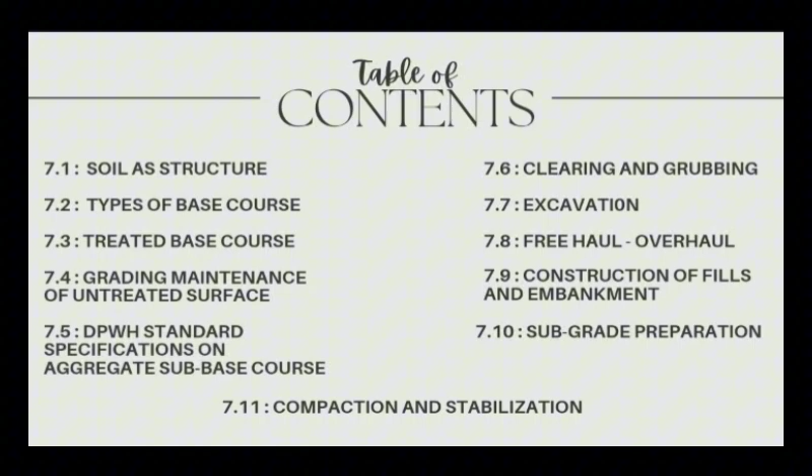Today, we will be exploring the essential process of constructing the roadbed, an integral foundation for ensuring the stability, durability, and safety of our roadways. We will be discussing the soil structure, types of base course, treated base course, grading maintenance of untreated surface, DPWH standard specifications on aggregate sub-base course, clearing and grubbing, excavation, freehaul, overhaul, construction of fills and embankment, subgrade preparation, and compaction and stabilization.

So first, we will be discussing about soil as structure.

Early road constructions have concentrated mainly on the road surface pavement. Little attention was given to the subgrade, the base materials, and the manner of construction, more particularly the placing and compacting of the pavement foundation.

As a result, too many road failures, past and present, were recorded with endless maintenance and rehabilitation activities. Because of these very expensive undertakings, highway agencies were prompted to undertake advanced researches and studies on the properties of subgrade and soil performance under severe conditions.

After a long study of the unending road failures, road agencies have established a more detailed procedure regarding the kind of materials to be used on a particular condition, type, and behavior of the soil where the road is to be constructed. So, a roadway has three major structural parts, namely the subgrade or subbase, the base course, and the pavement.

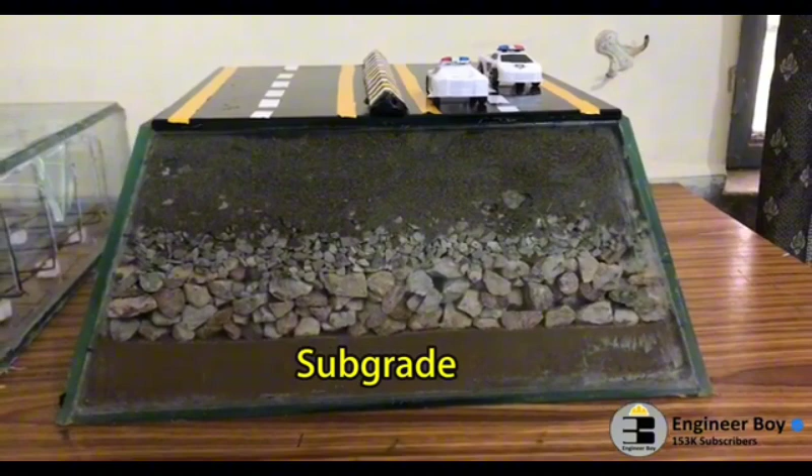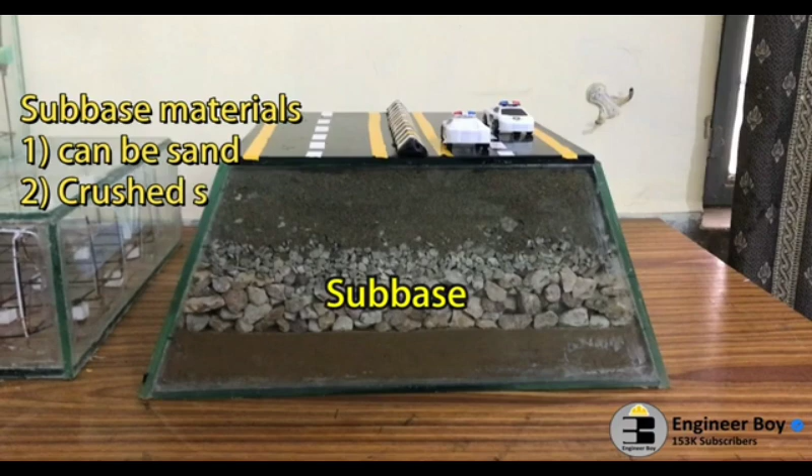Highway or road is a transportation mode on which traffic moves from one place to another. Hey guys, I'm Suleiman Khan, and in this video, we'll be learning about different road components. Number 1 indicates subgrade. Subgrade is just like the foundation of the road, or the lowest component of the road structure, which bears all the load and transfers it through grain-to-grain contact. Subgrade, being the lowest component, is normally constructed at least 60 centimeters above the highest flood level of the area. If the natural surface level is above the formation level, the surface is cut down to the proposed subgrade surface; if it is below the formation level, the subgrade is kept above the ground level. Subgrade is sometimes compacted with a roller, and camber, or transverse slope, is provided to drain off surface water. Next we have the subbase, which is constructed above the subgrade; if the subgrade has high bearing capacity, the subbase may not be required. Subbase is provided to prevent the rise of water, or capillary action of subsurface water, toward the pavement. Subbase may contain filling materials such as sand, gravel, or sometimes stones. The thickness of this layer after compaction with an 8 to 10 ton roller is normally kept at 7 to 15 centimeters.

And then we have the base layer, which is constructed above the subbase, and it forms the foundation for the road surface or topping. This is just the main component of road which can be paved of cement or maybe bituminous concrete. The thickness of this layer depends upon the bearing capacity of subgrade, and the magnitude of the applied load. And then finally we have the road surfacing or road topping, which can be made up of bituminous material.

For flexible pavement, asphalt concrete is used, and in case of rigid pavement, RCC or PCC may be used. This layer, the road surfacing or road topping, prevents the penetration of water into the base layer and saves the lower layers from the abrasion and other weathering effects of the moving vehicle. This layer also provides a smooth surface for the traffic.

And that's it. This is what I got.

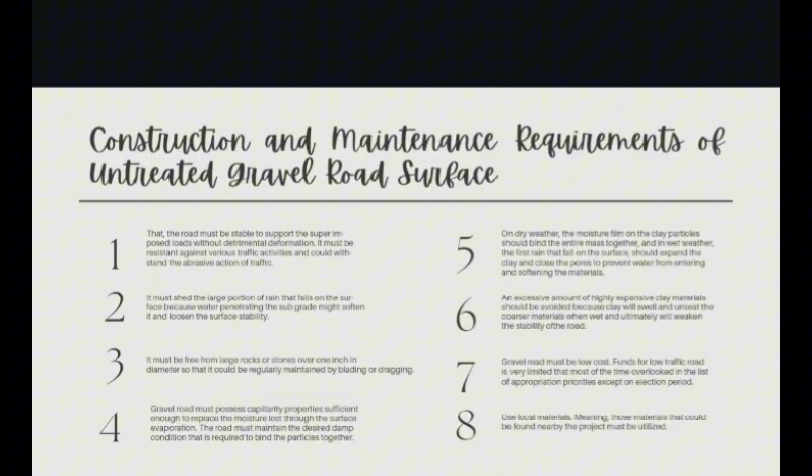So we have the construction and maintenance requirements of untreated gravel road surface. Number 1, the road must be stable to support the superimposed loads without detrimental deformation. It must be resistant against various traffic activities and could withstand the abrasive action of traffic.

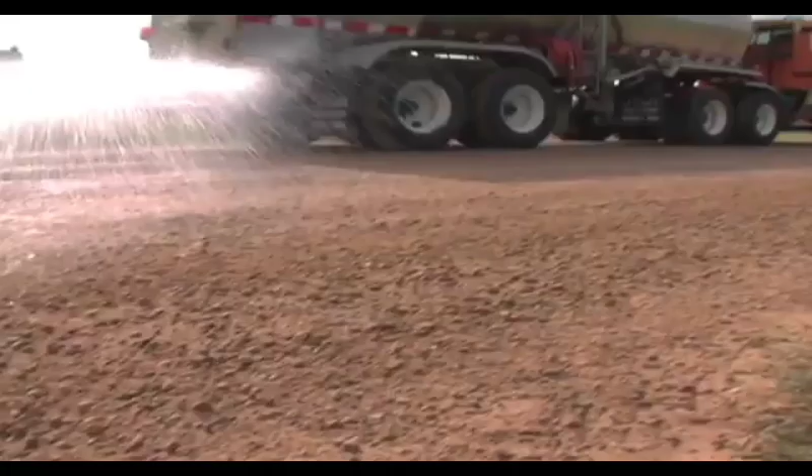What does it take to keep a gravel road in the best condition? Well-maintained gravel roads are the result of a solid maintenance and improvement plan, adequate funding, good materials, good training, and good equipment. A motor grader is the primary piece of equipment used to maintain gravel roads.

Road agencies use a grader to blade gravel roads as often as once or twice a week to once or twice a year, depending on the condition of the road, traffic volumes, and weather conditions.

The crown is the center of the road where it comes together and peaks in the middle. If you don't have enough crown, when it rains, water comes and it congregates just on the road and doesn't really shed off. And then over time, if it's wet in the fall, because that water isn't shedding off, you have more moisture in the road.

And then when it freezes, it expands and causes more frost boils come springtime. Roads are weakest during the spring thaw, when soils are saturated with ground moisture. To protect the investment in the road, it's important to follow weight restrictions each spring.

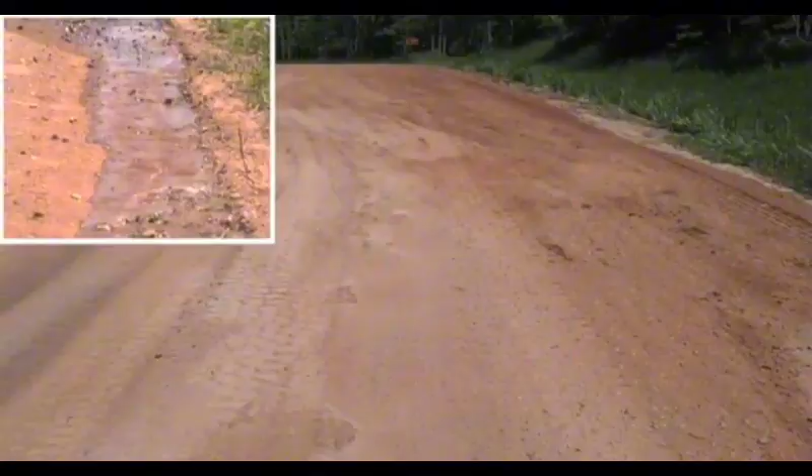What are common problems with gravel roads? There are several major categories of distresses that can be identified in gravel roads: poor drainage, corrugations or washboarding, dust, potholes, ruts, and loose aggregate.

For the most part, these common problems depend on the specific materials used to construct the road, how they are mixed, and how they are placed to ensure proper drainage.

Gravel roads need adequate moisture to sufficiently bind the materials together, especially in the protective surface layer. Without enough moisture, a gravel road will get very dusty, and the fines, which are essential for binding the surface materials, will blow away. The big thing about controlling dust on gravel roads is to only grade roads when you have adequate moisture, like after a rain or in the spring when there's some moisture in the road so that it seals back up.

Without enough binder, the road will washboard easily and leave a lot of loose aggregate on the road surface. In addition, slow rains will soak through the gravel, saturate the road subgrade, and make the road soft. But too much binder makes the road surface sloppy and slippery when it rains.

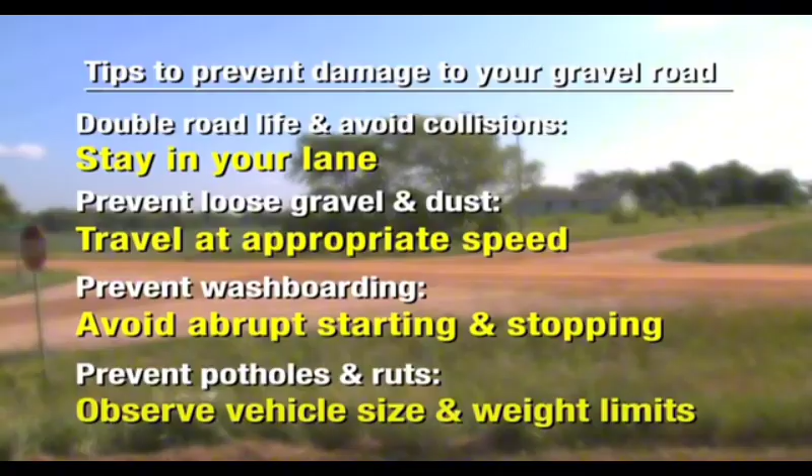What can you do to help maintain the gravel roads in your area? Your local county agency or township are doing the best they can to keep those roads smooth and safe. Local road users can help maintain gravel roads by simply exercising good driving habits. Help keep your gravel road in good condition by staying in your lane, traveling at an appropriate speed for the conditions, avoiding abrupt starting and stopping behavior, and observing vehicle size and weight restrictions. After all, many routine trips and the delivery of day-to-day products and services depend on gravel roads. Without a doubt, gravel roads are a critical part of our transportation infrastructure and an investment worth protecting.

So next, if the gravel surface road is to be maintained for several years without bituminous or asphalt surface treatment or other impervious surfacing, AASHTO standard specifications require a maximum liquid limit of 35 and a plastic index of 4 to 9, and a maximum 8% passing the number 200 sieve.

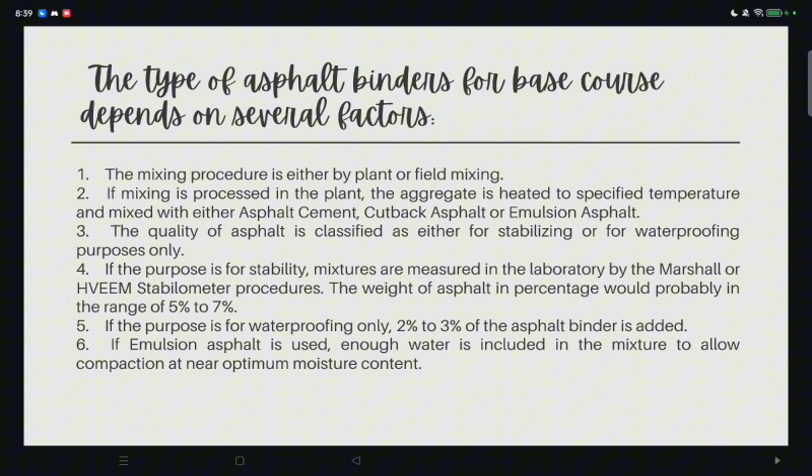So these are HVEEM stabilometer and Marshall stability test machine.

Next, sand and asphalt base course. The sand and asphalt base course is composed of either loose beach sand, dune sand, or river sand cemented with asphalt materials. In early road construction, sand and clay mixture was used not only as road surfaces but also for base courses. But lately, cutback asphalt, emulsified asphalt, or tars have been introduced as substitutes for clay binders to produce quality base courses for roads and highways.

Sand for mixing asphalt should be clean and strong, because the surface properties and grain shape must have the quality to resist displacement under load. If the quality of available sand is not satisfactory, it may be blended with sharp angular particles like crushed aggregate, stone, or screened slag, stone dust, loess, cement, or other non-cohesive minerals to produce a stable mixture.

The test could be done by the Hubbard-Field, Marshall, and HVEEM stabilometer procedures.

So, a sand and asphalt base course is a strong foundation for roads. It's made from clean, strong sand like beach, dune, or river sand, and asphalt like cutback, emulsified, or tar.

So the requirements for this are: first, sand must resist displacement under heavy loads. Second, sand quality can be improved by mixing with stronger materials like crushed stones, slag, or cement.

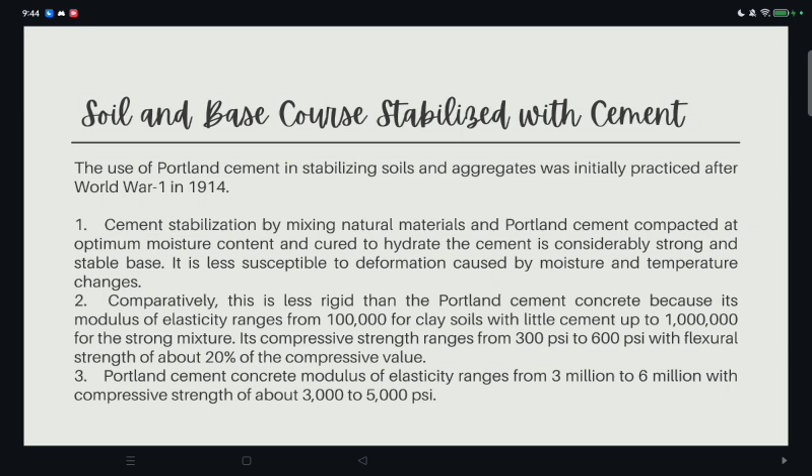So after World War I, builders started mixing Portland cement with soil and aggregates to create strong road bases. The benefit of this cement stabilization is that it resists moisture and temperature changes, and it provides stability and durability. Its comparison to concrete is that it is less rigid than concrete. The flexural strength is 20% of compressive strength. The compressive strength is 300 to 600 psi.

Next, the stabilized cement mixture is called soil cement, produced using abundant native local materials, subdivided into 3 types. First, sandy and gravelly soils containing less than 25% silt and clay. Second, sand with lesser amount of fines like beach sand, glacial, and windblown sand. And lastly, silty and clayey soils.

Materials having plasticity index greater than 30 are rarely used, unless lime is added. Materials with high pH or sulfate content are not advisable for use.

The cement content for the stabilized mixture ranges from 5% to 14% by volume, or 3% to 16% by weight of dry aggregates. Sandy and gravelly soils require less cement, unlike silty and clayey soils that need a higher percentage of cement. The dry densities of cement stabilized mixture compacted by AASHTO standard methods range from 135 pounds per cubic foot for well-graded gravel down to 85 pounds per cubic foot for silty or clayey soils. The recommended field density is about 95%.

The quality of aggregate cement mixture is measured by its ability to resist abrasion and disintegration. Other methods of testing for stabilized cement content are the unconfined and triaxial compression and flexure tests.

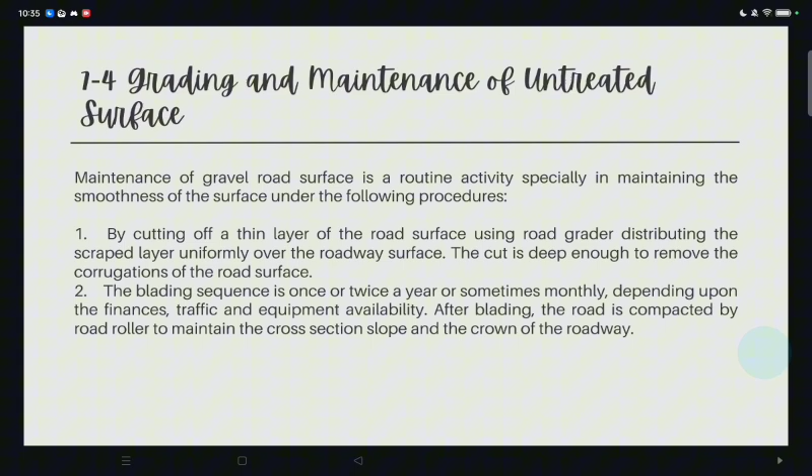Third, the most effective routine maintenance is done immediately after rainfall, when the surface is soft for the blade to drag. Fourth, losses of materials caused by grading and traffic wear generally range from 1/2 to 1 inch of thickness per year, although this varies due to traffic volume, rainfall, wind intensity, frequency, and maintenance practice or habit.

Lastly, compaction is effectively done using pneumatic, tired, or steel-wheeled rollers, where the surface is tight and non-ravelling, so sealing may be omitted. Next, we'll discuss the DPWH standard specifications and aggregate sub-base course.

The Department of Public Works and Highways classified the aggregate sub-base course as Item 200, which consists of furnishing, placing, and compacting aggregate sub-base course on a prepared subgrade.

For Item 200 material requirements, aggregates for sub-base shall consist of hard, durable particles or fragments of crushed stone, crushed slag, or crushed or natural gravel, and filler of natural or crushed sand or other finely divided mineral matter. The composite material should be free of vegetable matter and lumps or balls of clay, so that it can be compacted readily to form a stable base.

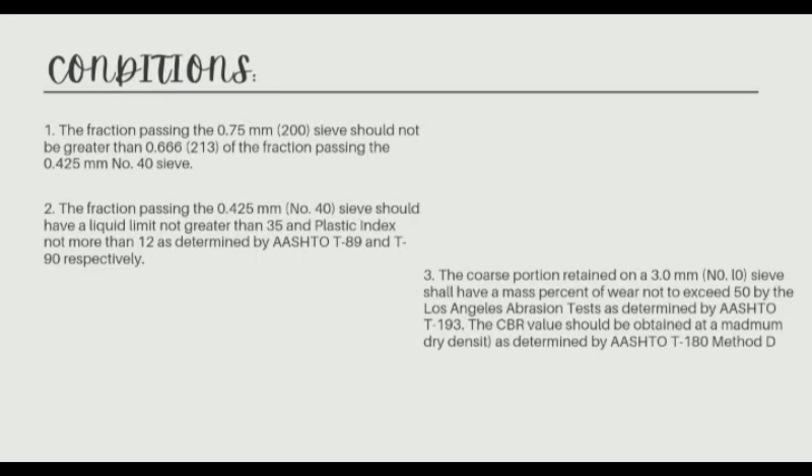Condition number 3: the coarse portion retained on a 3 millimeter, or Number 10 sieve, shall have a mass percent of wear not to exceed 50 by the Los Angeles abrasion test, as determined by AASHTO T193. A CBR value should be obtained at maximum dry density as determined by AASHTO T180, Method D.

Number 2: the fraction passing the 0.425 millimeter, or Number 40 sieve, shall have a liquid limit not greater than 25 and a plastic index not greater than 6.

Number 3: the coarse portion retained on a 2 millimeter, or Number 10 sieve, shall have a mass percent of wear not to exceed 50. Number 4: the materials passing a 20 millimeter or 3/4 inch sieve shall have a soaked CBR value of not less than 80%.

So makita natin sa right side ng table 7.4, ang grading requirements for item 201. Ano na siya? Sieve designation, kag ang mass percent passing.

Next is the item 202 material requirements. Number 1, the portion passing the 0.075 millimeters, number 200 sieve, shall not be greater than 0.66, or 2/3 of the portion passing the 0.425 millimeters, number 40 sieve. The portion passing the 0.425 millimeters, number 40 sieve, shall have a liquid limit not more than 25 and plastic index not more than 6. Number 3, the coarse aggregate retained on 2 millimeters, or number 10 sieve, shall have a mass percent of wear not more than 45 by LA abrasion tests, and not less than 50 mass percent, shall have at least one fractured face.

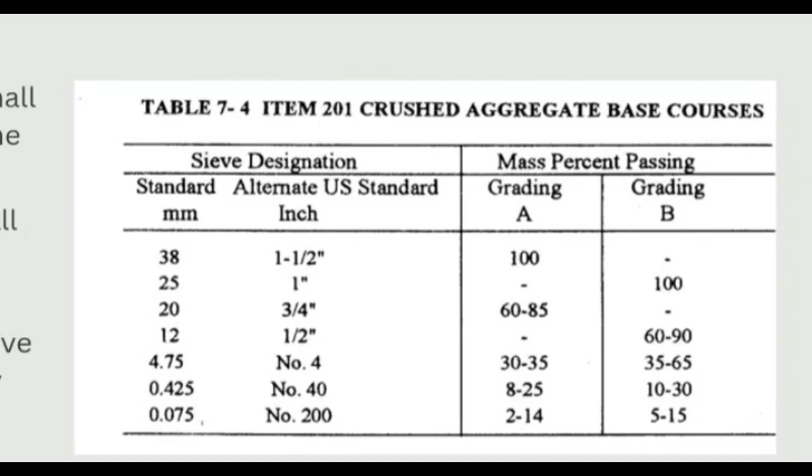Number 4, the material passing a 20 millimeters or 3/4 inches sieve shall have a minimum soaked CBR value of 80%. So nakita natin sa right side ng table 7.4, gin-zoom ko siya. Ang item 201, crushed aggregate base courses, you have the designation, ang sieve, kag ang mass percent passing. We have grading A kag grading B.

Next is the item 203, lime stabilized road mix base course. So this item consists of foundation for a surface course composed of soil aggregate, lime and water proportion mixed on site and constructed on a prepared subgrade or subbase.

So ang item 203 ko, is about sa lime stabilized road mix base course. Ini nga item consists sa soil aggregate, lime, kag water proportion nga gin-mix sa pag-prepare sang subgrade kag subbase. So bale ginaadan siya sang lime mixture.

So may material requirements tana. Number 1, soil aggregates refers to the combination of gravel, sand, silt, and clay or other approved combination of materials free of vegetable or other objectionable matter that might be encountered in the construction site or obtained from other approved sources. Ang soil aggregate refers sa combinations ng gravel, sand, silt, kag clay, or iban nga approved combinations ng material nga wala sang organic matter, wala sang vegetable, kag iban pa nga objectionable matter nga ma-encounter ta sa construction site.

Number 2, the intent of the specification is to utilize soil existing on the roadbed if the quality is satisfactory according to the specifications and minimizing cost. So need natin i-specify para mabalanta kung ang soil nga exist sa roadbed, kung ang quality niya ba ay satisfactory na based sa specifications.

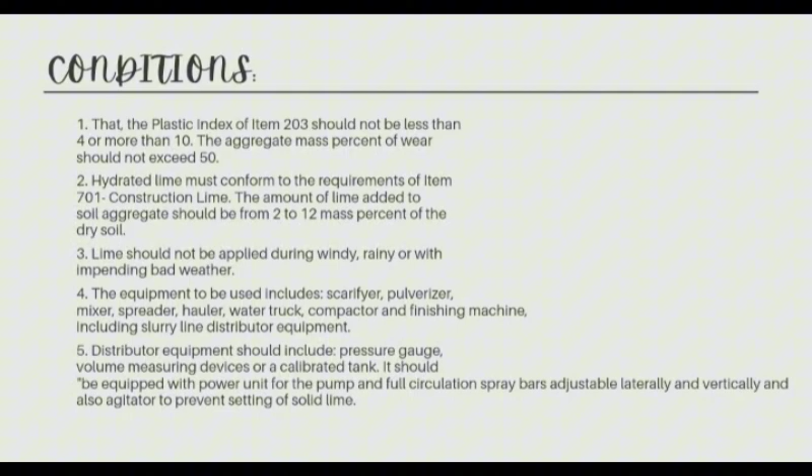Next is the preparation of the soil aggregate. Case 1 for new soil aggregate: the existing road bed is scarified lightly and bladed to a uniform grade according to the plan, then rolled, watered, and rolled. All depressions appearing on the surface are filled, and weak portions of the road bed are strengthened with new soil aggregate. Allow 1 day for measuring, sampling, and testing of the sample for approval of quality and gradation before spreading the windrow for application of hydrated lime.

If soil aggregate moisture exceeds 2 mass percent of the dry aggregates, apply aeration by harrowing the soil aggregate until the moisture content is reduced to 2 percent or less.

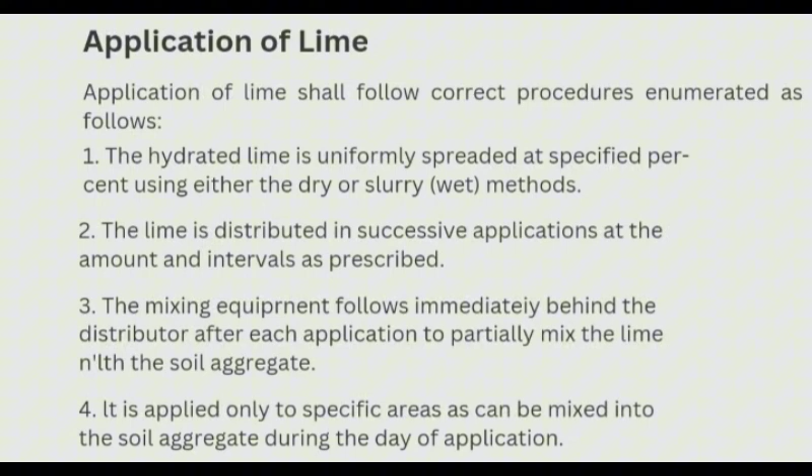It is applied only to specific areas as can be mixed into the soil aggregate during the day of application. The application is either by spotting bags of lime at equal predetermined transverse and longitudinal intervals, or by applying in bulk from equipped self-loading trucks.

If lime slurry or wet method is employed, the typical slurry ratio is 1,000 kilograms of lime to 2 cubic meters of water. The actual mixing proportion depends upon the percent of lime specified, the type of soil, and its moisture condition.

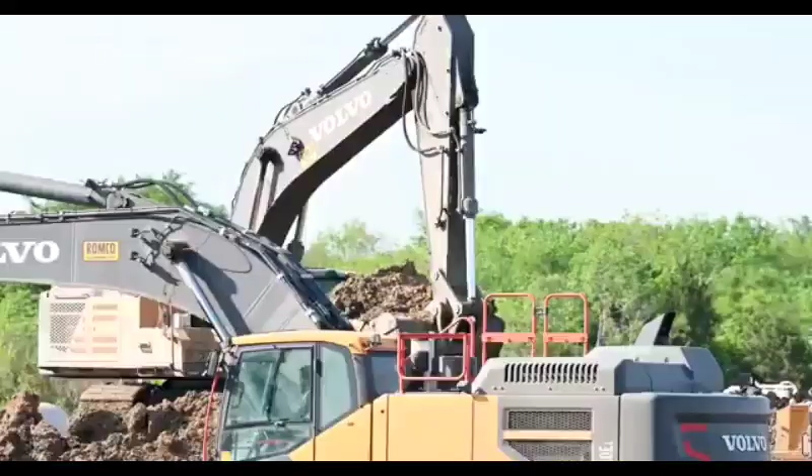Out here we are on site with LGE Design Build today, flying their job with some drones, and caught a little bit of the lime treatment process that they're dealing with right now.

Here in North Texas, we have absolutely terrible soil as far as the top layer goes. We've got some shale underneath, some rock under that, but overall the soil out here in Dallas and the DFW, North Texas region, is really bad.

The reason why it's so bad is because as rain comes in, and as we get these summer days where it's really dry, what tends to happen is the rain will swell the soil and make it huge like a sponge, and then once it dries out, it'll shrink back, kind of like that crack effect if you've ever seen a desert picture where it's cracked.

Same thing - the water will just be gone immediately, and it will shrink back down to its old size. Then it will do that over and over again until it breaks your foundation to bits.

So there are really three ways to mitigate that here in the North Texas area. One is to import actual quality soil as your pad. The second is to moisture condition your pad, taking all your soil and mixing water into it, then compacting it to get your maximum PVR.

Your PVR is your potential vertical rise. That's normally within the range of 2 to 15 inches in this area, which is a huge change in elevation when you hear water to soil ratios. Once they mix that water in with the soil, they will compact it on lifts until they get their maximum PVR and densities.

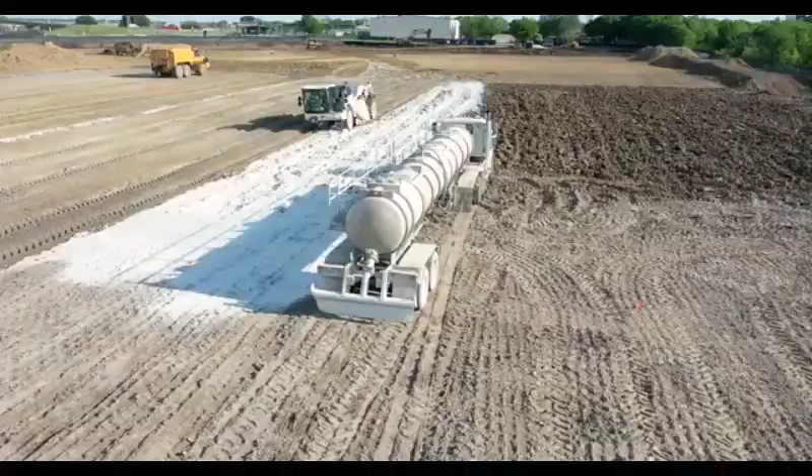Once they've got it to the pad, they've ripped up the soil on top with the rake of a dozer. That gives easy access for all that hydrated lime to seep into the soil and makes it easy to mix. Once they lay down that hydrated lime out of the truck, the pulverizer comes in right behind it and mixes it up.

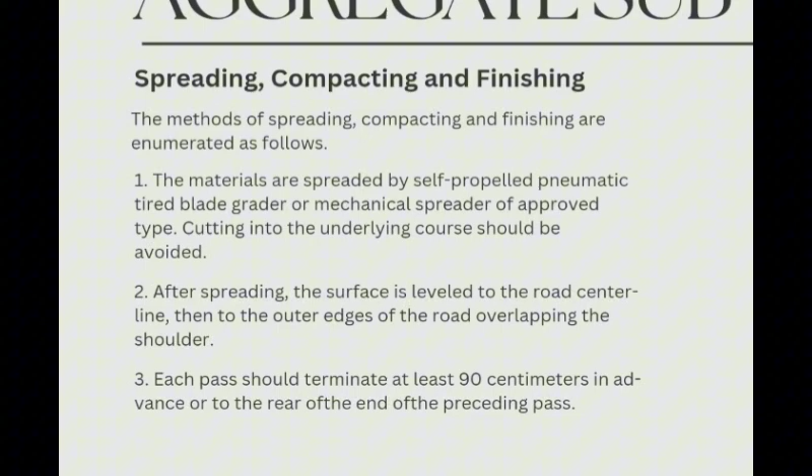So next is ang protection, curing, and maintenance. After stabilizing the base course by lime, it is protected against rapid drying for a period of at least 5 days by either of the following curing methods. Number 1, a thorough and continuous moist condition should be maintained by sprinkling water. Number 2, the surface must be covered with 50 millimeters layer of earth or sand and maintained in moist condition. Number 3, the surface is applied with asphalt membrane of the type and quantity approved by the highway agency.

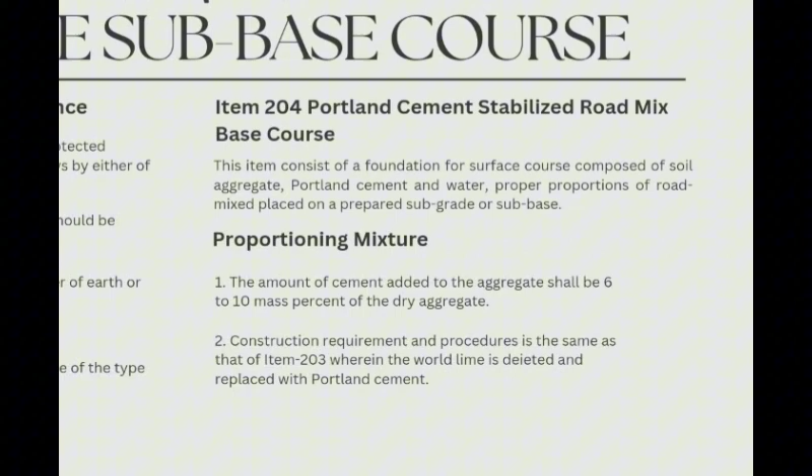So we have item 204, Portland cement stabilized road mix base course. This item consists of a foundation for surface course composed of soil aggregates, Portland cement, and water in proper proportions of road mix placed on a prepared subgrade or subbase. Sa item 204, consists siya sang soil aggregate, Portland cement, kag water. Proportioning mixture: Number 1, the amount of cement added to the aggregate shall be 6 to 10 mass percent of the dry aggregate. Number 2, construction requirement and procedure is the same as item 203, wherein the word lime is deleted and replaced with Portland cement.

So meron makita item 205 and then item 206. Item 205, asphalt stabilized road mix base course. Materials: asphalt materials should be anionic or cationic emulsion asphalt of the slow setting type. Mixture proportion: the amount of asphalt material to be added to the aggregate should be from 4 to 7 mass percent of the dry aggregate.

So we have procedures. Number 1, aggregates to be treated is placed in uniform windrows spread to uniform thickness to the required depth. Number 2, Portland cement of proper quantity is applied uniformly in a trench on top of the windrow or spread uniformly over the aggregates. Number 3, mixing is done by machine for a thorough uniform blended mixture. Number 4, when this method is used, a maximum time of 2 hours is allowed for wet mixing, laydown, and finishing. So next, central plant mixing method.

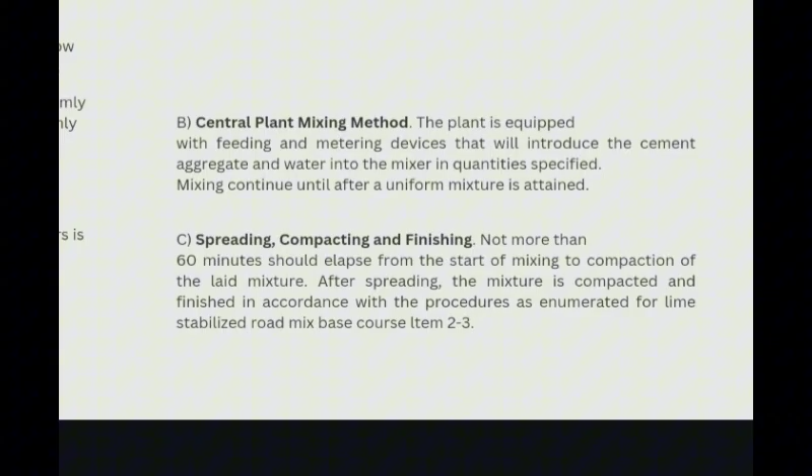Our next topic is clearing and grubbing. This is categorized under Item 100 of the DPWH Standard Specifications. It consists of clearing, grubbing, removing, and disposing of all vegetable matter and debris except those objects designated to remain in place or to be removed in accordance with other provisions of the specifications. It also includes preservation from injury or defacement of all objects designated to remain. So clearing and grubbing means removing plants, debris, and obstacles, disposing of waste, and safeguarding the remaining structures.

So we remove surface objects like trees and stumps. A stump is the remaining base or lower part of a tree. It's the lower part of the tree trunk after the tree has been cut down or has fallen. So whatever remains after the tree is cut, that base or lower part of the trunk is called the stump.

Next is the methods of measurement: number 1, area basis; 2, lump sum basis; 3, individual unit basis or selective clearing. Let's focus on number 1, the area basis: measured by hectare and fractions thereof, acceptably cleared and grubbed. So under area basis, a cleared area is measured per hectare, meaning you are paid per hectare cleared.

So number 2 is the lump sum basis. No measurement of area will be made for this item. Like sa lump sum basis, it's a single fixed payment based on what was agreed upon. Once the payment is fixed, there are no add-ons, no additions, and no required area measurement.

Last is individual unit basis or selective clearing. The diameter of trees will be measured at a height of 1.4 meters above the ground. Trees less than 15 centimeters in diameter will not be measured for payment. So sa individual unit basis or selective clearing, the diameter of trees will be measured at a height of 1.4 meters above the ground. The payment here is pay per tree, and only for trees greater than or equal to 15 centimeters in diameter. So if the tree's diameter is less than 15 centimeters, wala ka bayaran.

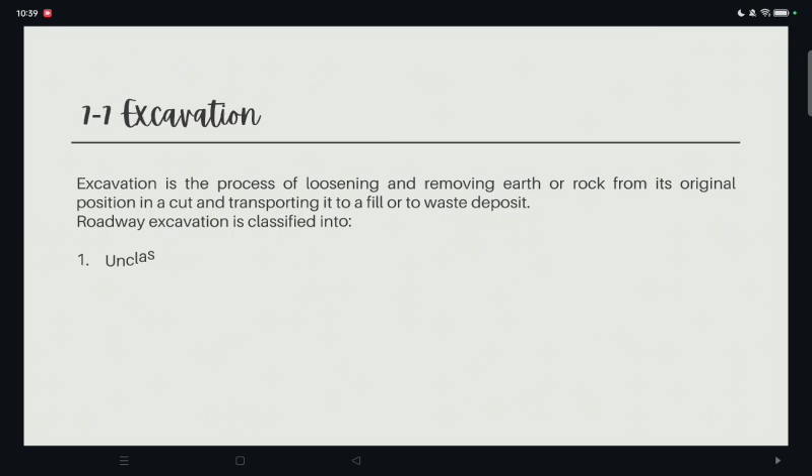So the next topic is 7-1, excavation. Excavation is the process of loosening and removing earth or rock from its original position in a cut and transporting it to fill or to waste deposit.

Roadway excavation is classified into unclassified excavation, rock excavation, common excavation, muck excavation, and borrow excavation. Unclassified excavation is the excavation and disposal of all materials, regardless of its nature, that are not classified and included in the bill of quantities under other pay items. In short, removing mixed materials of any type.

Rock excavation consists of igneous, sedimentary, and metamorphic rocks that cannot be excavated without blasting, or the use of rippers, and all boulders or other detached stones each having a volume of 1 cubic meter. In short, blasting or ripping hard rocks and boulders.

Common excavation are those that are not included in the bill of quantities under rock excavation or other pay items. In short, regular digging, not rock or specialized.

Muck excavation consists of the removal and disposal of deposits of saturated or unsaturated mixtures of soils and organic matter not suitable for foundation materials, regardless of moisture contents. In short, removing soggy, unstable soil and organic matter.

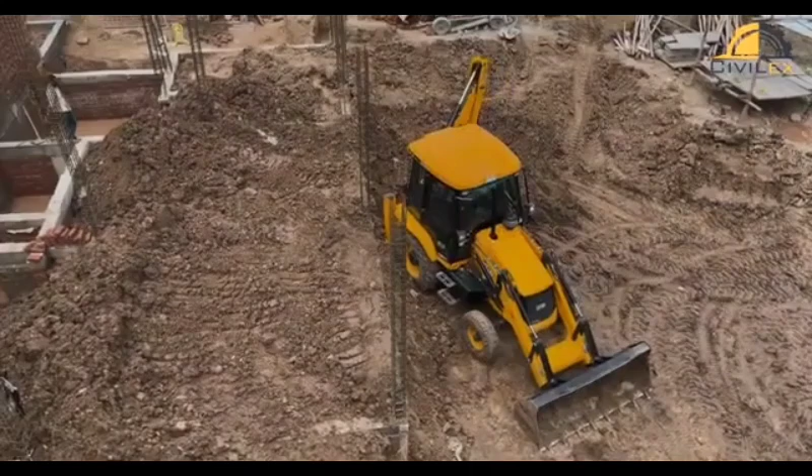Excavation is a critical process in construction, used to prepare building sites by removing soil and rocks from the ground. Here are some key points to know about excavation in construction. Purpose of excavation: the primary purpose of excavation in construction is to create a foundation for a building or other structure. This involves removing soil, rocks, and other materials to create a level surface where the foundation can be built. Excavation may also be necessary for other purposes, such as installing utilities, building retaining walls, or creating drainage systems.

Types of excavation. There are several types of excavation used in construction, including strip excavation, basement excavation, and trench excavation. Strip excavation involves removing soil from a large area to create a level building site. Basement excavation involves digging a hole in the ground to create a basement level for a building. Trench excavation involves digging a narrow, deep trench for the purpose of installing utilities or other features.

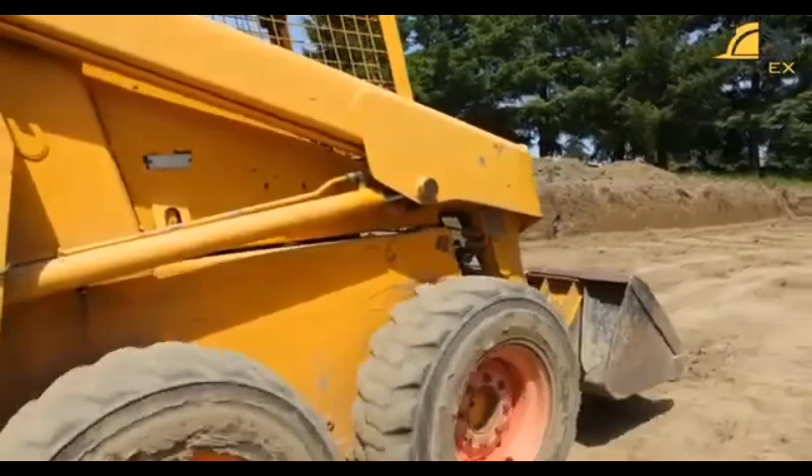Excavation equipment. Excavation work in construction is typically done using heavy machinery, such as backhoes, bulldozers, and excavators. These machines are designed to remove large amounts of soil and other materials quickly and efficiently. Smaller tools, such as shovels and handheld excavation tools, may also be used for more precise work or in areas where heavy machinery is not practical.

Safety considerations. Excavation work in construction can be dangerous, especially when heavy machinery is involved. Proper safety measures, such as fencing off the excavation site, using proper protective gear, and following strict safety protocols, are critical to avoiding accidents and injuries.

Regulations and permits. Excavation work in construction is subject to a range of regulations and permit requirements, including environmental regulations and local building codes. It is important to obtain the necessary permits and approvals before beginning excavation work, and to follow all regulations and guidelines throughout the excavation process.

Overall, excavation is a critical part of construction and requires careful planning, skilled workers, and adherence to safety regulations to ensure that the excavation is carried out safely and effectively.

Construction requirements: first, when there is evidence of discrepancies between the actual elevations and that shown on the plans, a pre-construction survey with reference to the datum plane used in the approved plan is undertaken by the contractor or agency to serve as basis for computation of the actual volume excavated.

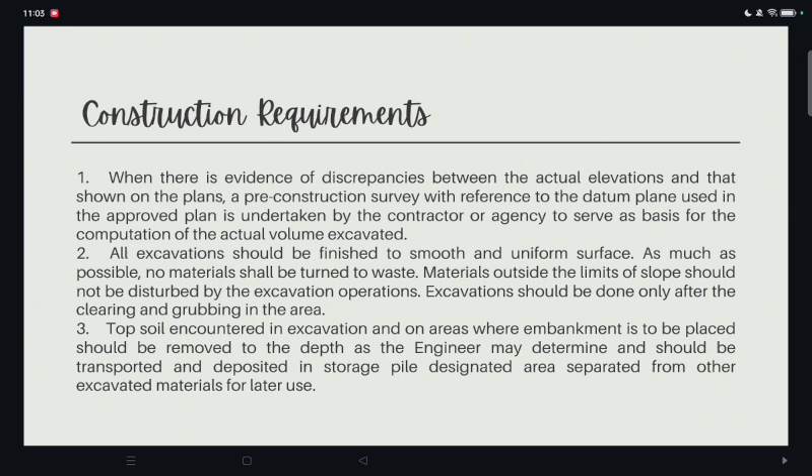So the preparation for this is that, first, clear and grub—remove vegetation and debris before excavating. And second, set aside topsoil for later use, separating it from other excavated materials.

The use of excavated materials: all suitable materials removed from the excavation area are used in the formation of, first, embankment or raised areas; second, subgrade or base layer; third, shoulders or road sides; fourth, slope; fifth, bedding or foundation layers; and lastly, backfill for structures or filling gaps around structures.

All unsuitable materials that could not be properly compacted in embankment must be disposed of without delay, for it might be included in the work when the engineer turns his back for a cup of coffee. Borrowed materials should not be placed until after the readily accessible roadway excavation has been placed in the fill.

So unsuitable material is removed promptly and not used for construction. And borrowed materials are used after completing accessible excavation, and approved materials only.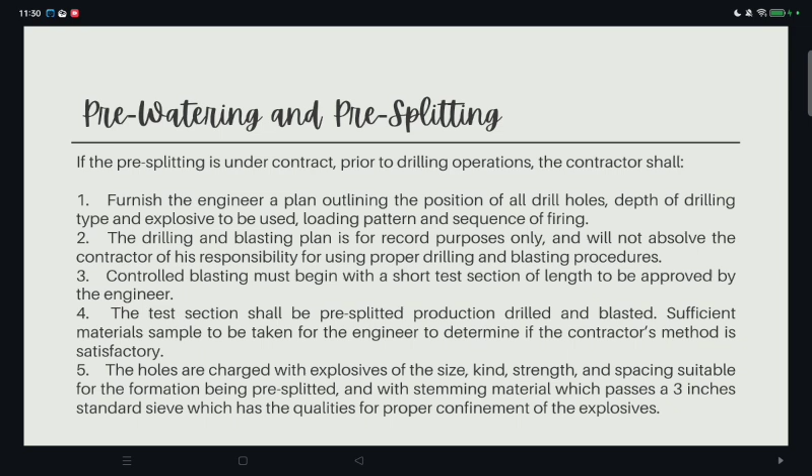The holes are charged with explosives of the size, kind, strength, and spacing suitable for the formation being pre-splitted, and with stemming material which passes a 3-inch standard sieve, which has the qualities for proper confinement of the explosives.

The finished pre-split slope should be reasonably uniform and free of loose rocks. Variance from the true plane of the excavated backslope should not exceed 30 centimeters. Localized irregularities or surface variations that do not constitute a safety hazard or impairment to drainage courses or facilities will be permitted.

The maximum offset of 60 centimeters will be permitted for a construction working bench at the bottom of each lift, for use in drilling the next lower pre-splitting pattern. The engineer may order discontinuance of the pre-splitting when the materials encountered are unsuitable for pre-splitting.

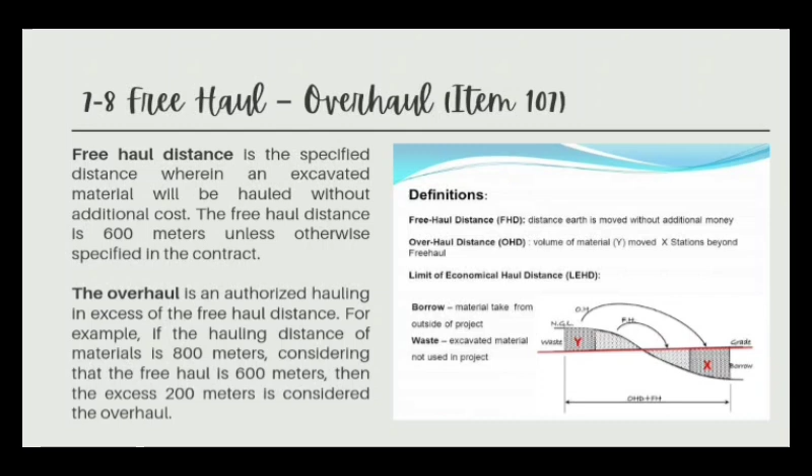Next is the overhaul, which is an authorized hauling in excess of the freehaul distance. For example, if the hauling distance of materials is 800 meters, considering that the freehaul is 600 meters, the excess 200 meters is considered overhaul. So in overhaul, there is payment involved once you exceed the 600 meters. In freehaul, there's no additional cost, but in overhaul, you need to pay for the excess beyond 600 meters.

Next is the methods of measurement. The overhaul distance for material obtained and placed within the roadway limits will be measured along the center line of the roadway. No allowance will be made for transverse or lateral movement to or from the center line, except materials moved to or from designated areas outside the roadway limits. If the contractor chooses to haul materials from another source, which is longer than the designated source, payment will be based on the overhaul distance measured along the route designated by the engineer. Payment will be made based on the number of cubic meters of overhauled materials multiplied by the overhaul distance in kilometers.

So the overhaul distance is measured along the roadway's center line, excluding lateral movements, unless materials are moved to or from designated outside areas. The payment is calculated by multiplying the volume of overhauled materials, in cubic meters, by the overhaul distance in kilometers. That's how you get the payment, to know how much you need to pay for the excess distance due to overhaul.

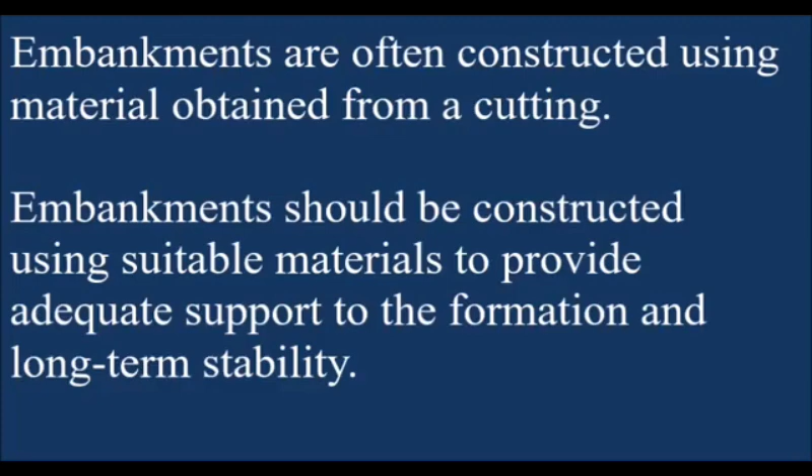Embankments are often constructed using materials obtained from cutting. Embankments should be constructed using suitable materials to provide adequate support to the formation and long-term stability. Embankment is defined as the height of construction required to match the subgrade bottom at any given location. The height of embankment is generally calculated as the difference in levels of the finished road level and the original ground level, the subgrade, and the crust thickness at any given location.

The bed is made ready to receive the fresh material for new layer construction by sprinkling water and doing a plain pass. Care should be taken to collect the material from the approved borrow areas for better performance. If there is a change in the borrow area, this needs to be immediately communicated to the central lab for collection of sample and testing.

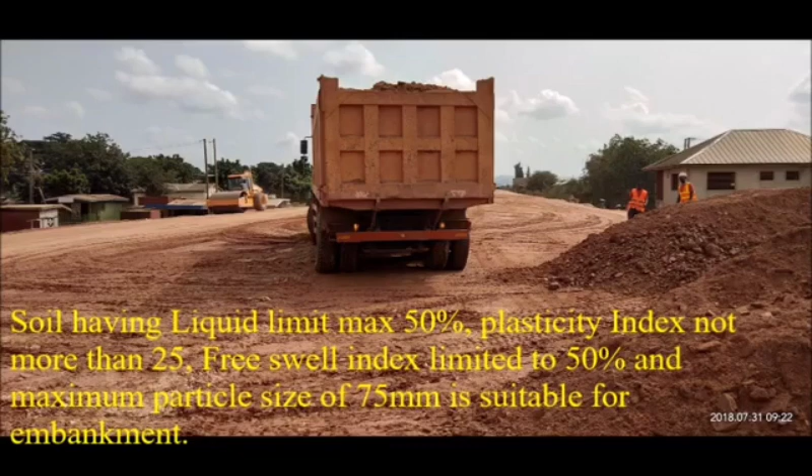Material suitable for earthwork has a Proctor value of 1.52 grams per cc for a height of 3 meters, and 1.60 grams per cc for a height more than 3 meters in embankment construction.

Soil having a liquid limit value of 50%, plasticity index not more than 25, FSI limited to 50%, and maximum particle size 75 mm is suitable for embankment work.

The quantity of earth required is calculated based on the layer thickness and the width per meter run in length. Depending on the compaction factor, the loose thickness is considered for dumping of soil.

The calculated quantity of earth required to fill is dumped using dump trucks as shown in the video. Supervisors will guide the dumping of materials in the bed so that it will be easy for grading and removal of vegetation, if any, in the soil.

Constant watch on the number of trips dumped on the bed will ensure the thickness of the compacted soil is maintained. Generally, we prefer to have a 250 mm layer compacted thickness maintained in embankment.

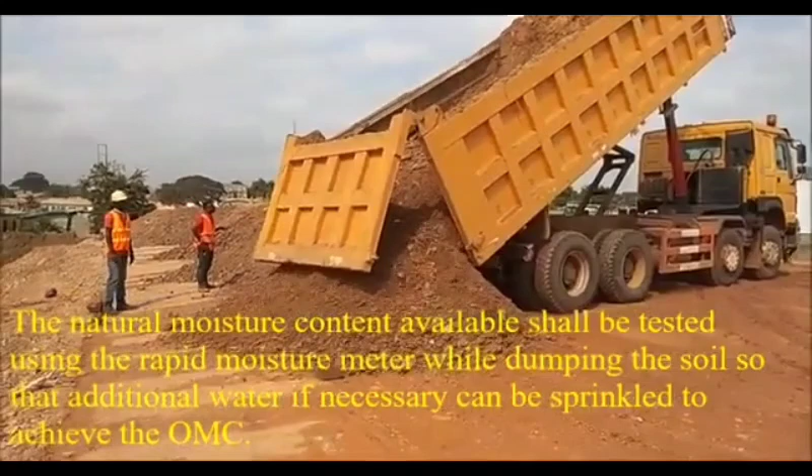The movement of vehicles in the forward and backward directions with jerk while lifting the dump bed will ensure proper unloading of material from the truck during construction of the embankment, as shown in the video. Hydraulics are used in lifting the dump bed to the extent required so that the tailgate opens automatically and allows the discharge of material on the bed.

The natural moisture content available shall be tested using the rapid moisture meter while dumping the soil, so that additional water, if necessary, can be sprinkled to achieve the OMC during rolling.

It is required to maintain the correct moisture level during compaction, as with increase in moisture the density increases and then decreases after achieving the OMC for a particular soil.

The roots and vegetation shall be removed from the bed before rolling and finishing. Particles bigger than 75 mm shall be removed from the bed if they are not being crushed to smaller size during the process of rolling.

The heaps shall be uniformly spread by the dozer to achieve the required thickness. The dozed material can be graded to maintain the level and camber as per the design drawings.

Water is sprinkled using the sprayer fixed to the water tanker, as shown in the process, to achieve the required moisture for optimum compaction. The moisture shall always be within the range of OMC +1 and -2%.

Grading is done using the motor grader to spread the material uniformly, maintaining the line and levels as per the drawing.

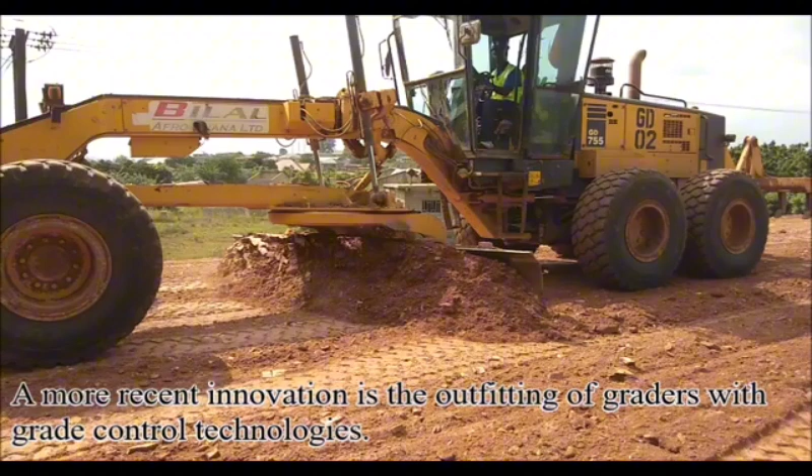The angle, tilt or pitch, and height of the grader blades can be adjusted to achieve precision grading of a surface.

In civil engineering, the grader's purpose is to finish the grade, to refine or set precisely the bed at the required level.

A more recent innovation is the outfitting of graders with grade control technologies, such as those manufactured by Topcon Positioning System, Trimble Navigation, Leica Geosystems, or Mikrofyn, for precise grade control and potentially stakeless construction. Manufacturers such as Caterpillar have also begun to interface these technologies into their machines out of the factory.

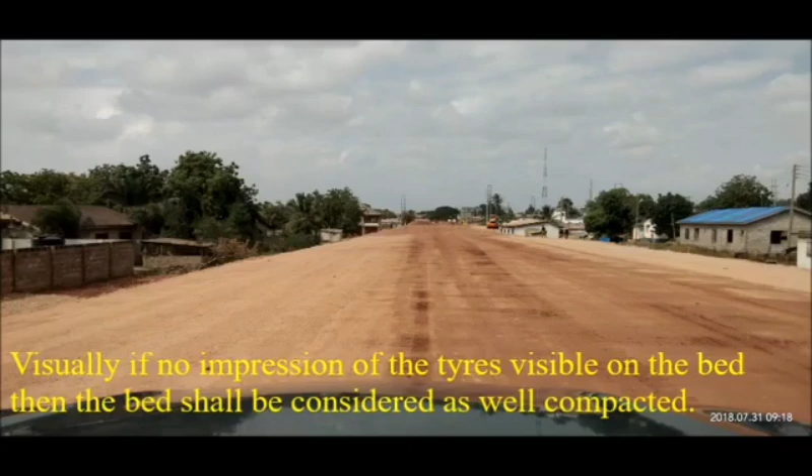For the best results, it is always advisable to compact the surface at the optimum moisture content, as maximum density can be achieved at this moisture level.

As the moisture dries up, even the highest compactive effort will not result in meeting the requirements, thus failing the surface. Because FDD reduces with the reduction in moisture during compaction, the ratio FDD by MDD results in achieving less compaction than required in the field.

Even after compaction, the vegetation, if any, shall be removed from the bed manually for better quality. As the moisture dries up, even the highest compactive efforts will not result in meeting the requirements, thus failing the surface. Visually, if no impression of tires is visible on the bed, then the bed shall be considered well compacted.

Localized patches of impressions indicate the possibility of entrapped air in the region and shall be removed before proceeding further.

Basically, there are two procedures employed to assure specified embankment density. First, to specify the expected value or minimum acceptable amount of relative compaction, and to ascertain from the field density tests that the specified value is obtained.

Second, to specify the manner and methods of constructing the embankment, particularly the layer thickness, moisture control, and the number of passes by a roller of specified type and weight.

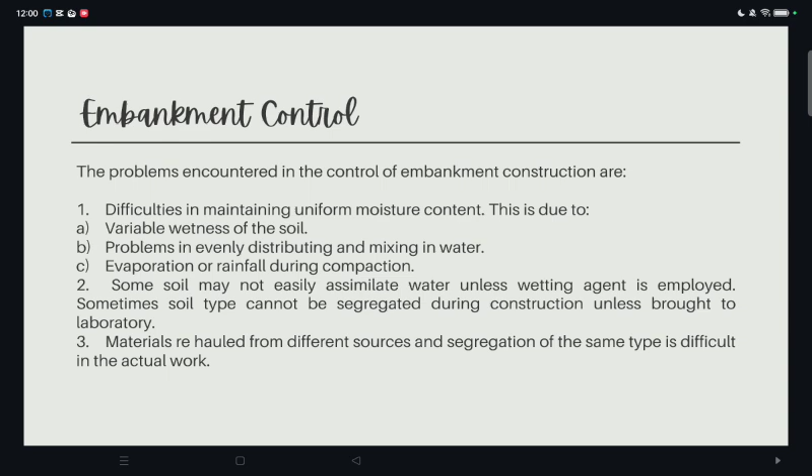The problems encountered in the control of embankment construction are: first, difficulties in maintaining uniform moisture content. This is due to variable wetness of the soil, problems in evenly distributing and mixing in water, and evaporation or rainfall during compaction. Second, some soil may not easily assimilate water unless a wetting agent is employed. Sometimes soil type cannot be segregated during construction unless brought to the laboratory.

Third, materials are hauled from different sources and segregation of the same type is difficult in the actual work. Next, the construction requirements and equipment: density test requirements, moisture control, compaction equipment like tamping rollers, grid rollers, pneumatic tire rollers, smooth tire rollers, vibratory compactors, and hauling and spreading equipment.

The tamping roller varies from a light unit tare weight of 6,000 to 10,000 pounds for an 8 feet width. For a giant fully loaded roller, it can be 75,000 pounds for a 10 feet width.

Grid rollers are effective in breaking down clods and soft rock. Pneumatic tire rollers with rubber tires weigh 8 tons or more, up to 200 tons for airport use. Smooth tired rollers of the 2 or 3 wheeled type are used to compact bases and bituminous surfaces. Vibratory compactors are effective in compacting stones of macadam roads.

Hauling and spreading equipment: hauling equipment in particular is used to move building or drilling supplies, soil, and other materials. Below is an overview of the types of hauling equipment commonly used in construction and more: cranes, bulldozers, excavators, loaders, shovels, tractors, and trucks.

Embankment on swampy areas: conventional construction of roadways in swampy areas is not advisable because records show that muck and peat provide unstable support for fills, causing failure of highways and railroads. Construction of roadway through swampy area requires either of the following methods.

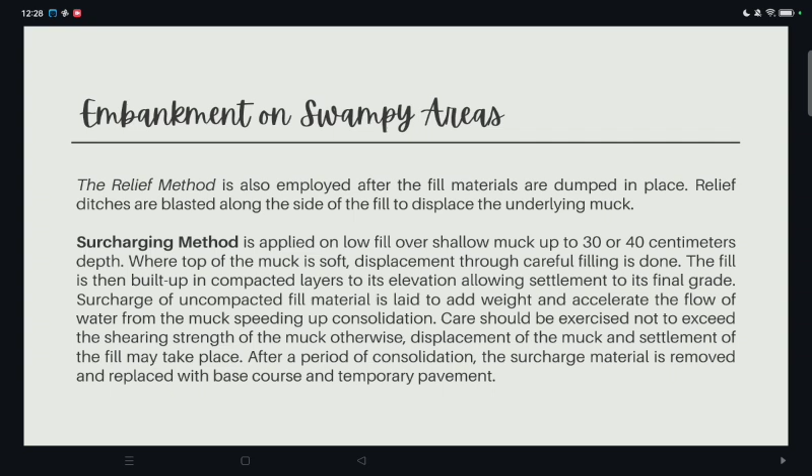Surcharge of uncompacted fill material is laid to add weight and accelerate the flow of water from the muck, speeding up consolidation. Care should be exercised not to exceed the shearing strength of the muck, otherwise displacement of the muck and settlement of the fill may take place. After a period of consolidation, the surcharge material is removed and replaced with base course and temporary pavement. So in surcharging, used for shallow muck less than 30 to 40 centimeters, add weight to accelerate consolidation.

The vertical sand drain method provides rapid consolidation of deep layer muck. Sand drains are vertical columns of sand that penetrate the muck almost to solid materials. Across the top is a horizontal blanket extending through the side slope of the fill. Under the pressure induced by the fill and surcharge, subsurface water flows up the drain and out of the fill, and rapid consolidation of the muck follows. So sand columns penetrate the muck; water flows out, giving rapid consolidation.

In the fabric reinforcement method, the muck is covered with permeable fabrics. In the weight reduction method, a block of styrofoam is installed over the muck to reduce the weight of the fill.

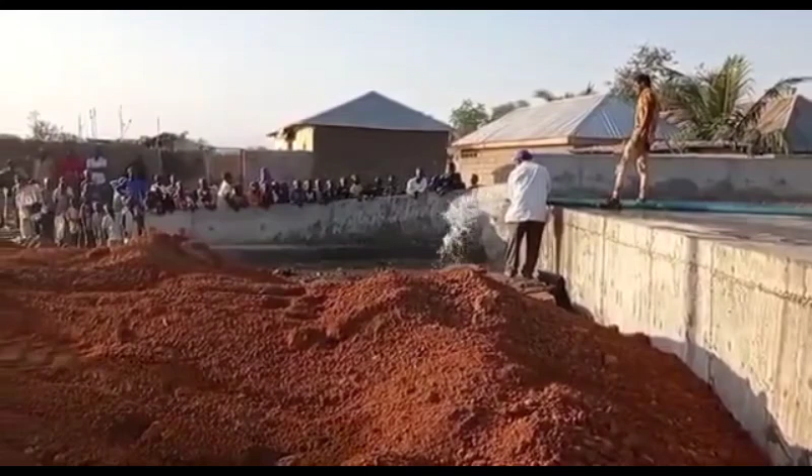Today in this video, I am going to share with you some details for the construction of a road where the water is all around the surface of the ground. As you can see, the water is hovering all around the place. That's why, in order to solve this problem, we have placed the boulders. After placing the boulders, we have put sharp sand and then we are placing the laterite.

Once we complete the filling of boulders and sharp sand, we shall do the sub base and base. As you can see here, we have started placing the laterite for the sub base. We are also pouring water all around so that it can gel well. You can see that the payloader is being used to spread the laterite.

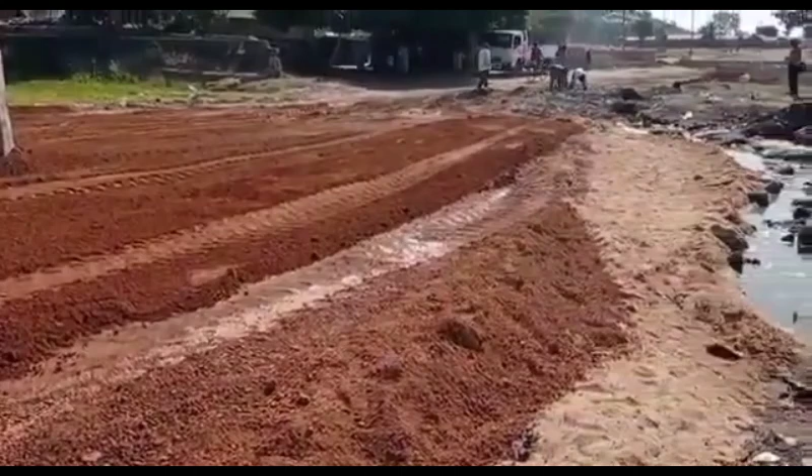After placing the laterite, we use this smooth roller as well as the sheepfoot roller. Make sure you do the compaction properly, since this place is very delicate. You have to make sure that you use the sheepfoot roller as well as the smooth roller, because these rollers help you achieve a very good compaction.

After doing the compaction, you can see that we are using the grader in order to do the grading of this laterite. After the completion of the sub base, the base course was started. This is the top of our double cell box culvert. It was around this place where we found a lot of water on the surface, which is the reason why we had to use boulders as well as sharp sand.

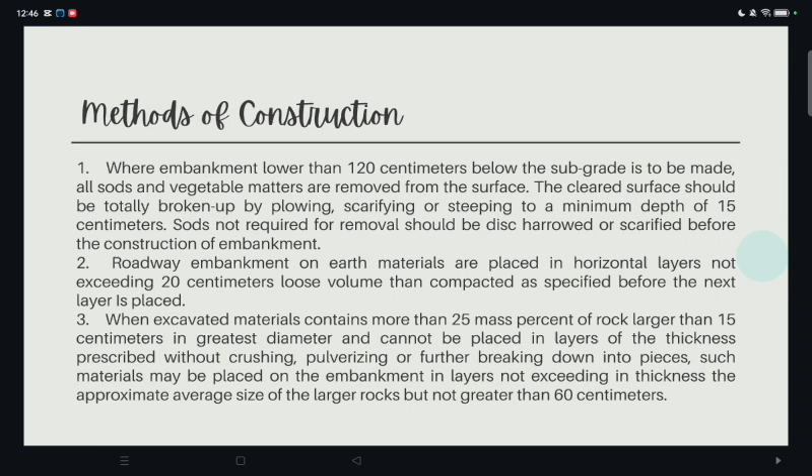Third, when excavated materials contain more than 25 mass percent of rock larger than 15 cm in greatest diameter and cannot be placed in layers of the thickness prescribed without crushing, pulverizing, or further breaking down into pieces, such materials may be placed on the embankment in layers not exceeding in thickness the approximate average size of the larger rocks, but not greater than 60 centimeters.

Fourth, lifts of materials containing more than 25 mass percent of rock larger than 15 centimeters in greatest dimension should not be constructed above an elevation of 30 centimeters below the finished subgrade. The balance of embankment should be composed of suitable material placed in layers not exceeding 20 centimeters in loose thickness and compacted as specified for embankment.

Fifth, hauling and leveling equipment should be routed and distributed over each layer of the fill to make use of compaction efforts afforded and to minimize rutting and uneven compaction.

Next, compaction. The contractors shall carry out full-scale compaction trials on areas not less than 10 meters wide and 50 meters long. Compaction trials with the main types of fill materials to be used in the work should be completed before any work with the corresponding materials is allowed to start. Throughout the period of compaction, the contractor should adhere to the compaction procedures found during the compaction trials for each type of material, compaction equipment employed, and each degree of compaction specified.

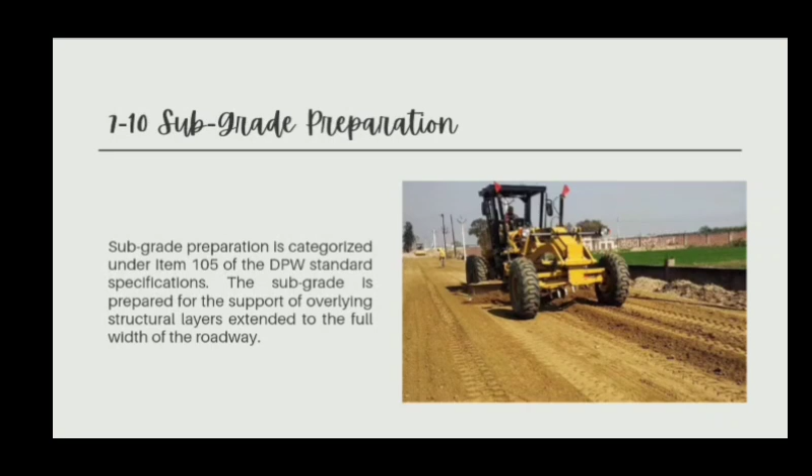Subgrade preparation is categorized under Item 105 of the DPWH standard specifications. The subgrade is prepared for the support of overlying structural layers, extended to the full width of the roadway.

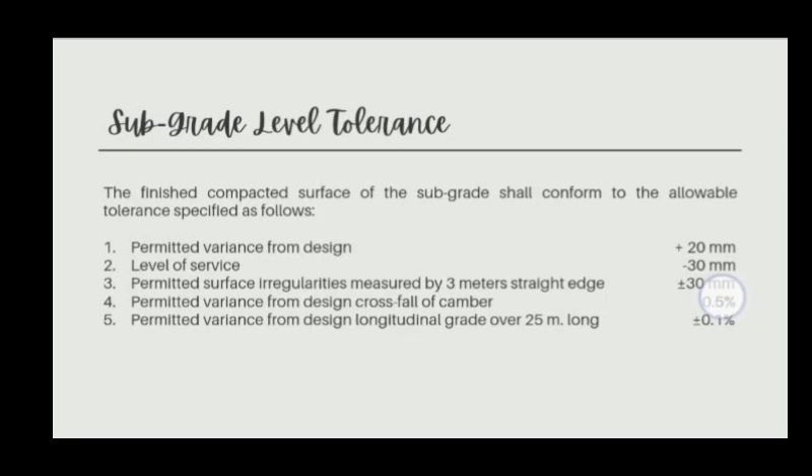Level of service: below 30 millimeters. Permitted surface irregularities, measured by a 3-meter straight edge, is above or below 30 millimeters.

Permitted variance from design crossfall or camber is 0.5%. Permitted variance from design longitudinal grade over 25 meters long is above or below 0.1%.

0.1%. So our last topic to be discussed will be compaction and stabilization.

Whether the soil is used as foundation material to support vertical structures, roads, or other structures, it is important to note if the in-place materials possess the following properties.

Number 1, the soil must have adequate strength. Number 2, the soil must be relatively incompressible to avoid significant future settlement, meaning minimal movement of the soil or structure over time.

Number 3, the soil must be stable against volume change as water content or other factors vary.

Number 4, the soil must be durable and safe against deterioration, meaning breakdown or decay, where it weakens or disintegrates over time.

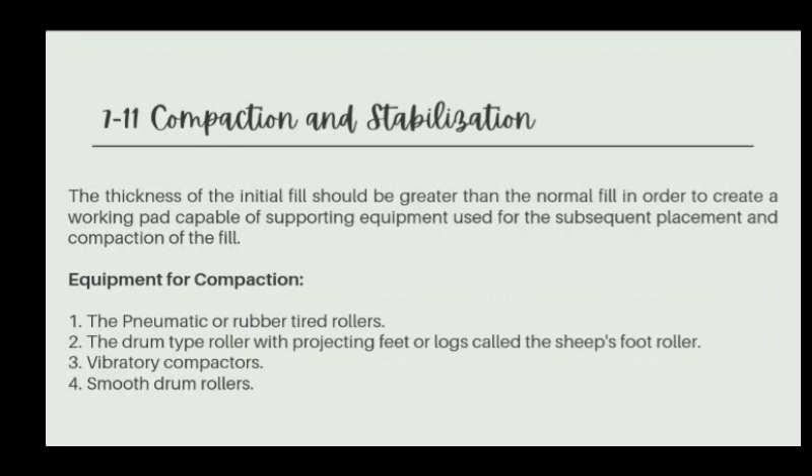If the height of the fill is reasonably high, the thickness of the initial fill should be greater than the normal fill in order to create a working pad capable of supporting equipment used for the subsequent placement and compaction of the fill.

So we have equipment for compaction. Number 1, pneumatic or rubber-tired rollers. The drum-type roller with projecting feet or lugs is called the sheep's foot roller, vibratory compactors, and smooth drum rollers.

First, we'll discuss the pneumatic tire roller. It can be used effectively in all types of soil. It compacts by kneading action, available as a self-propelled unit or as a towed unit. Load sizes vary from 20 tons to 200 tons, of which 50 tons is commonly used.

So the pneumatic tire roller is suitable for all types of soil, and its compaction method is kneading action. It is available as a self-propelled unit, which moves on its own, or as a towed unit, which is attached to another vehicle. Its load capacity is 20 to 200 tons, with 50 tons being commonly used.

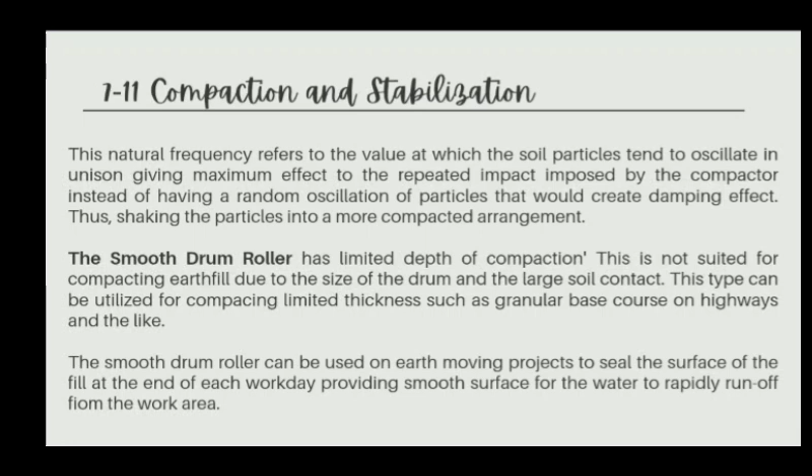Compaction equipment should be capable of obtaining compaction requirements without detrimentally affecting the compacted materials. The compacting unit may be of any type provided that they are capable of compacting each lift of material as specified and meet the minimum requirements. So the compaction equipment must be capable of obtaining the compaction requirements without negatively affecting the compacted materials.

Minimum requirements for road rollers: the pneumatic tire roller must have smooth tread tires of equal size that will provide uniform compacting pressure for the full width of the roller and capable of exerting ground pressure of at least 550 kilopascals. The sheepsfoot tamping or grid roller should be capable of exerting a force of 45 Newtons per millimeter, or 250 psi, of length of roller.

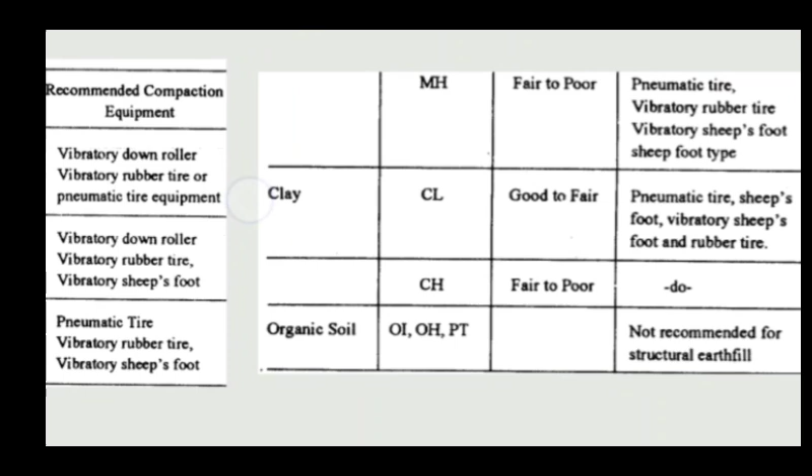For sand or sand-gravel with clay, meaning it has mixed clay, the compaction characteristic is good. The recommended compaction equipment is the vibratory drum roller, vibratory rubber tire, or vibratory sheepsfoot. Another type is silt, whose compaction characteristic is good to poor. The recommended compaction equipment to use is pneumatic tire, vibratory rubber tire, and vibratory sheepsfoot.

And so on and so forth for clay and organic soil. So you can see the soil compaction characteristics and the recommended equipment for compaction. Now we have a video on compaction.

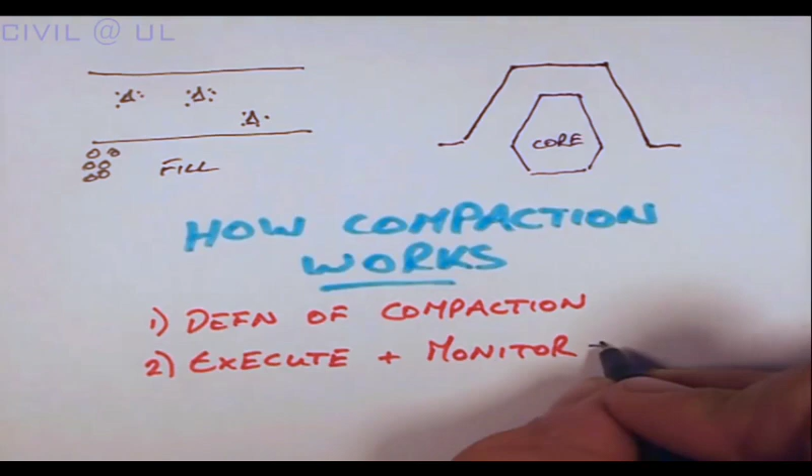Compaction is one of the construction tasks that takes place on practically every construction project, whether it is densifying fill beneath a slab on the ground or compacting the clay core of an earthen dam. Therefore, it is important that we understand how compaction works, and the good news is that the theory and practice is relatively simple. There are three things we need to know: firstly, what do we mean by compaction, or what is its definition? Second, how do we execute and monitor the compaction process to ensure that the finished product meets the engineer's specifications? And third, what is the theory behind soil compaction?

To begin, compaction is defined as the increase in soil density due to the expulsion of air, and this is done by mechanical means.

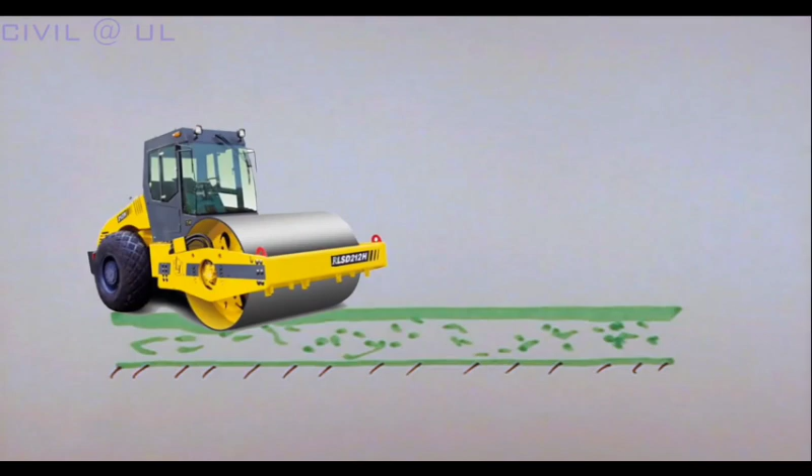Compaction is not to be confused with consolidation, which is the increase in soil density as a result of expulsion of moisture. As we saw earlier, this is a time-dependent process controlled by the permeability of the soil.

There are many techniques for compacting soil. Here are some of the more common methods.

For coarse-grained soils such as sands and gravels, smooth drum rollers are popular, and for small areas, whacker plates may be used. For fine-grained soils such as clays, sheep's foot rollers or pneumatic rollers are more popular.

This equipment is typically effective for relatively shallow lifts of soil, in the order of 250 mm loose lifts.

For deeper compaction of coarse-grained soils, an impact roller may be used. These are effective up to depths of approximately 1 meter and have a much higher operating velocity than the smooth drum roller, so they're much more efficient.

Even greater depths of compaction can be achieved by using dynamic compaction or vibroflotation techniques, although these methods have limitations when operating close to existing structures.

I encourage you to read the literature and search the internet for additional information and videos on the compaction process.

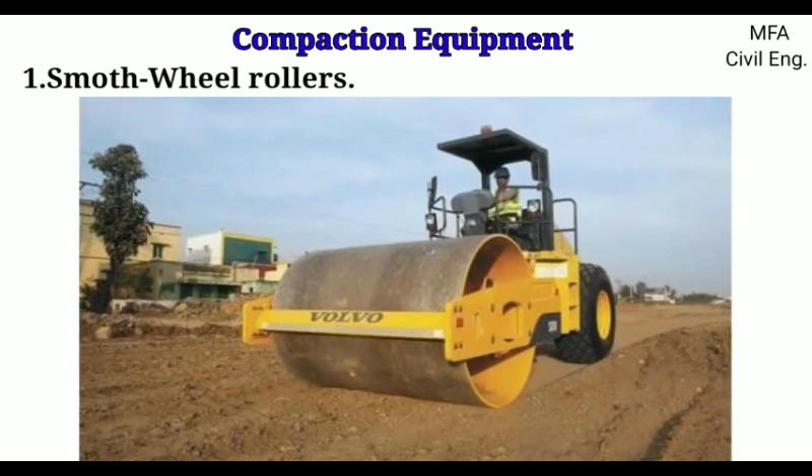These rollers may have one front and two rear wheels, the rear wheels being usually larger in diameter and the front one being wider. The weight of the roller can be increased by using hollow wheels which can be filled with water or sand ballast. These rollers are usually of diesel engine type.

The plain steel roller compacts only the top small thickness of the earth and its effect does not reach the bottom of the layer. The compacting effect is produced primarily by the static weight of the roller. After compaction, the roller leaves a smooth surface.

As the roller is pulled forward, a wave of soil is pushed up in the direction of movement, and with successive passage over the ground, the surface soil is gradually compacted. These rollers are effective in compacting granular soil like sand, gravels, and crushed stone.

For compacting earthwork in embankments and canals where deep compaction of the earth is required, sheep's foot rollers are used. Sheep's foot rollers are of three types: ordinary sheep's foot roller, convertible roller, and tamping foot roller.

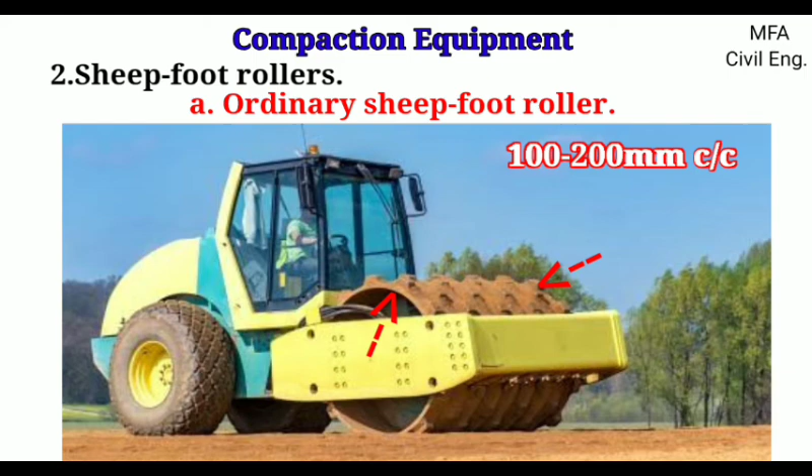Ordinary sheep's foot rollers produce good compaction throughout the thickness of the layer when the soil is clay or predominantly cohesive and impervious. The roller consists of a hollow steel drum with projected feet or projections mounted on the surface, arranged around the wheel at 100 to 200 mm center to center along the axis.

These tamping rollers may be constructed as self-propelled or as a tow unit. The sheep's foot rollers may weigh up to 15 tons or more and travel at a speed of 25 km per hour using a wheel tractor for towing.

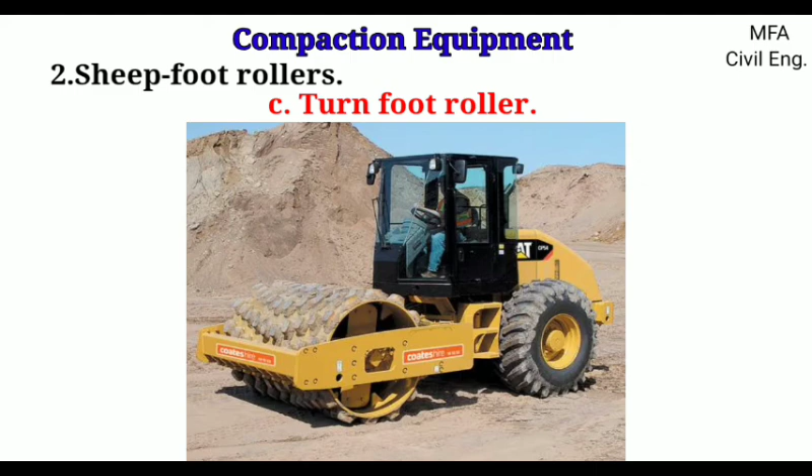As the roller moves over the surface, the feet penetrate the soil to produce a kneading action and pressure to mix and compact the soil from the bottom to top layer. With repeated passage of the rollers, the penetration of the feet decreases.

In case of turn foot rollers, the shape of the individual sheep's foot can be changed, thus varying the pressure on the soil.

A common type of pneumatic tire roller consists of a base or platform mounted between two axles, the rear of which has one or more wheels than the front one. The tires must be so arranged that the track of the forward wheels lies in between the track of the backward wheel. The pneumatic tire rollers are the most suitable for compacting fine-grained soil and well-graded sand.

The machine is self-propelled and ballasting is done using either water, sand, or pig iron to increase the self-weight. The major advantages are the ability to control the ground contact pressure by altering the weight of the machine, increasing the number of wheels, increasing the tire width, and changing the contact area of the tires by altering the inflation pressure.